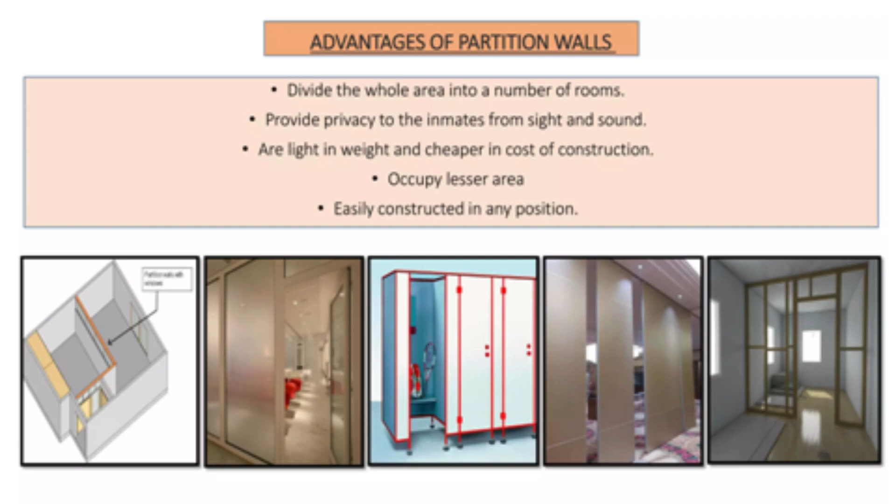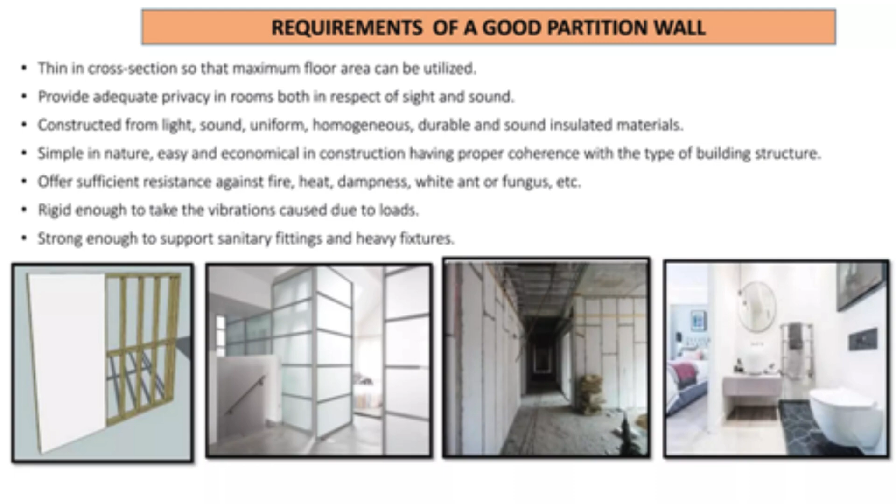Then the fifth one is offer sufficient resistance against fire, heat, dampness, white ants, or fungus. Then the sixth requirement is rigid enough to take the vibrations caused due to loads. And the seventh requirement of a good partition wall is strong enough to support sanitary fittings and heavy fixtures. So these were some of the requirements of the good partition wall.

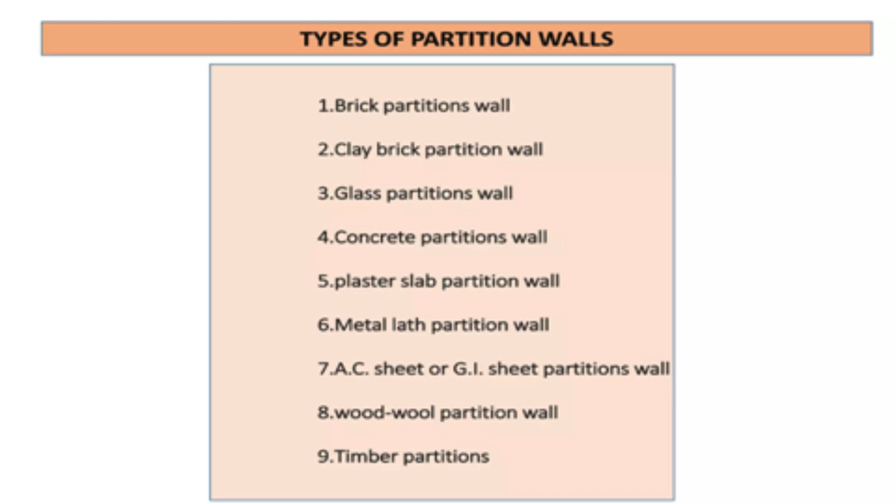Seventh is AC sheet partition wall. Eighth is wood wool partition wall. Ninth is timber partition. So these are some of the types of partition walls.

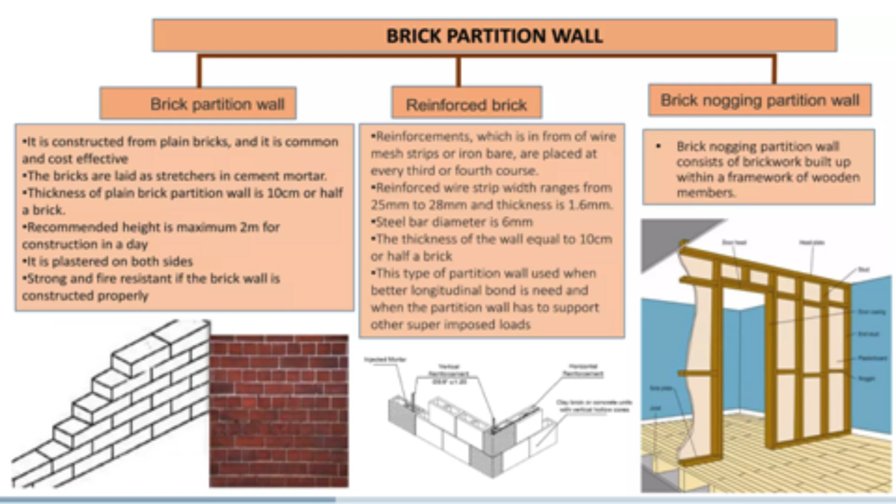Now coming to brick nogging partition wall. Brick nogging partition wall consists of brickwork built up within a framework of wooden members. तो wooden members के बीच में हमको इसमें brickwork करना होता है. तो you can see these three types in the figures also.

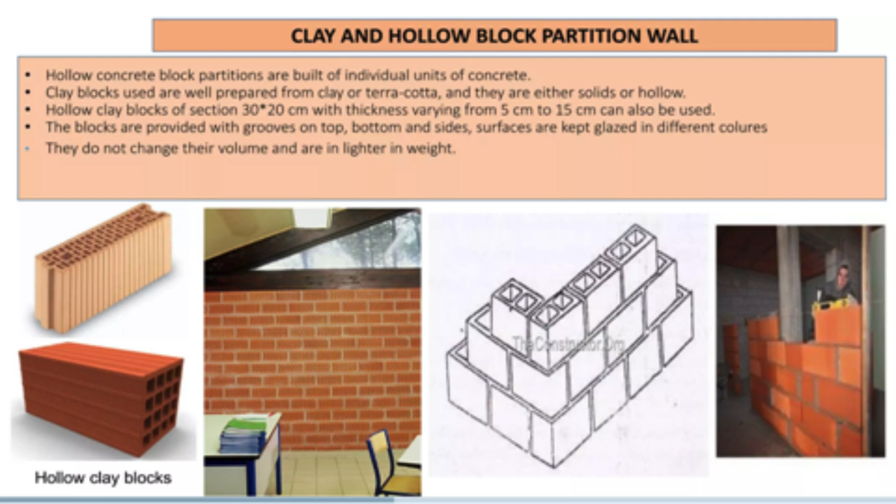Surfaces are kept glazed in different colors. They do not change their volume and are light in weight. So in the figure in the bottom, you can see these clay or hollow block partitions.

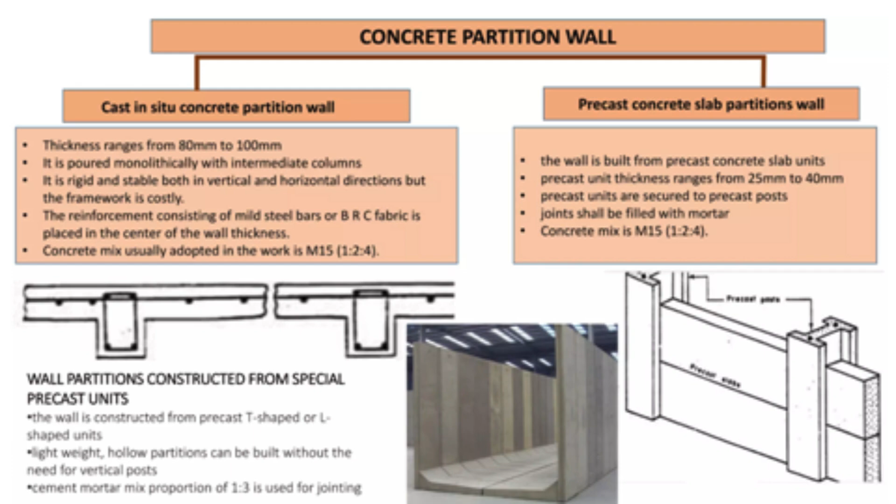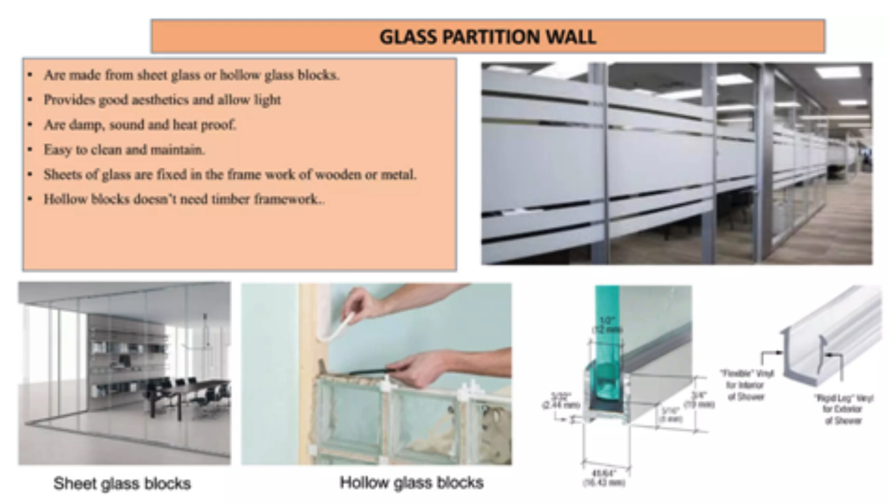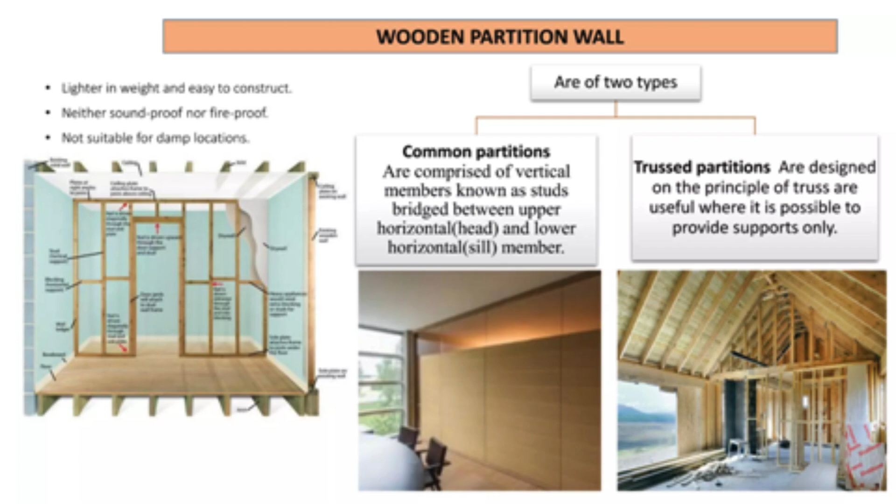Now coming to plaster slab partition wall. Plaster slab partitions or plaster boards are made from burnt gypsum or plaster of Paris mixed with sawdust or other fibrous material to reduce its weight. Units of plaster slabs are prepared in an iron or timber mold with a size of 1 to 2 meters long, 30 centimeters high and 50 to 100 mm thick. They are equipped with suitable grooves to create rigid joints.

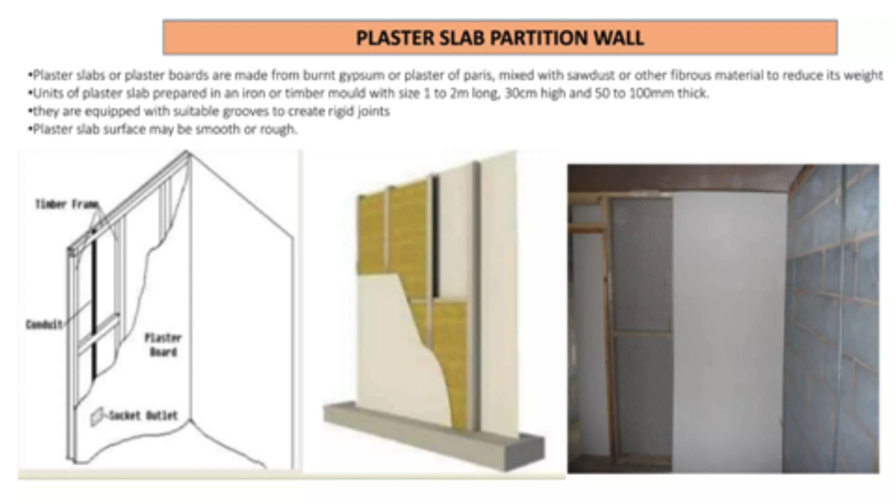Plaster slab's surface may be smooth or rough depending upon the nature of the surface treatment that is desired at finishing level. So this was about plaster slab partition wall.

Now coming to metal lath partition wall. Metal lath partition walls are thin, strong, durable, and considerably fire resistant. Metal lath partition walls are constructed by placing 2 centimeter or 2.5 centimeter channels vertically, called studs, and fixing metal lath to them on one side. Plaster is applied to both the sides of the metal. If a hollow partition is required, metal lath is fixed to the channel on both the sides and then the plaster is applied.

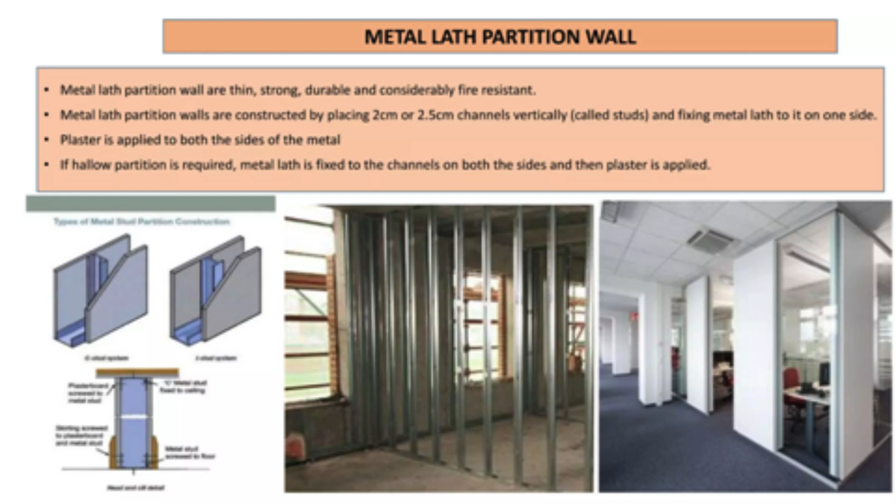So in the figure you can see the framework of the metal lath partition, and in the next figure it is the appearance of the partition wall after it is finished. So this was about metal lath partition wall.

Now moving to next, that is AC or GI sheet partition wall. So these partition walls are light in weight, impervious, durable, watertight and fireproof. Asbestos cement sheets are made of asbestos and cement and fixed into timber framework. Sheets are placed in position and joined by cement mortar. They are mostly adopted in works of temporary character. So in the figures you can see cement asbestos sheets being used as partition walls.

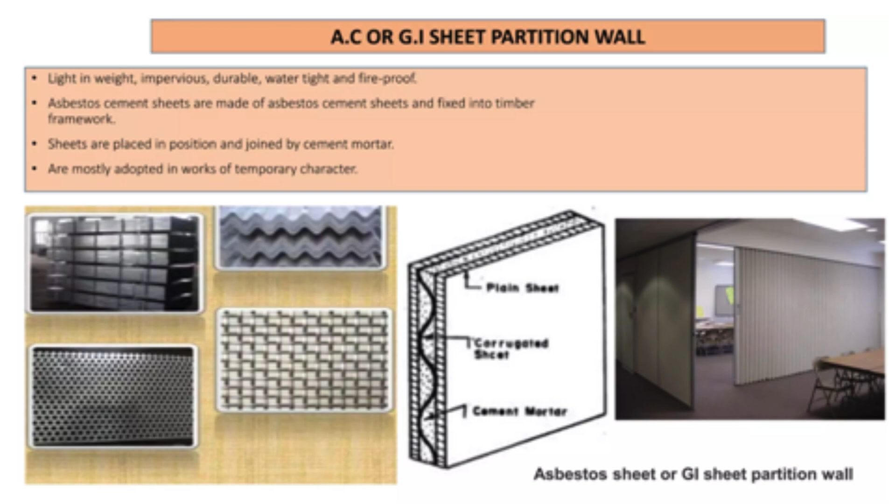Now the next classification of partition wall is based on the technique, or how they are employed for dividing the space. Before this, we were discussing partition walls whose classifications were based on the material from which these partition walls were made. Now we are discussing the different types of partition walls based on the function or hardware they are using. So basically it is divided into three types.

First is sliding. So a sliding partition consists of a series of panels that slide in tracks fixed to the floor and ceiling. The mechanism of the partition is similar to those of sliding doors. Sliding and folding partition walls. So sliding and folding partition walls operate in a similar manner to the sliding folding doors. They are normally used for smaller spans.

Screens. Screens are usually constructed of metal or timber frame. It is fixed with plywood and chipboard inside. The screens supported with legs for freestanding and easy movement are used. So these are also a specific type of partitions. Here the partition slides in the first case. In the second case, the partition is sliding and folding, that is, it can slide and fold one over the other. And in the third case, the partition is used as screens, that is for screening purpose.